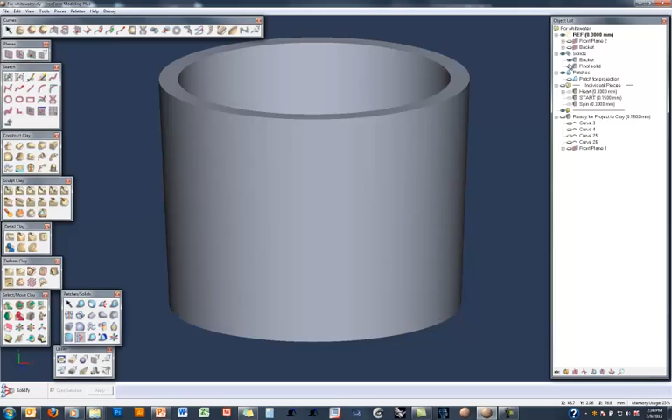So the steps we'd go through would be to import the bucket from the CAD system or build the bucket in FreeForm, no problem. Now, one of the key things here is that I'm going to do some sculpting, but first I'm going to offset one of these surfaces just a little bit, inset, and that's going to give me a load of clay, which is going to look basically like this.

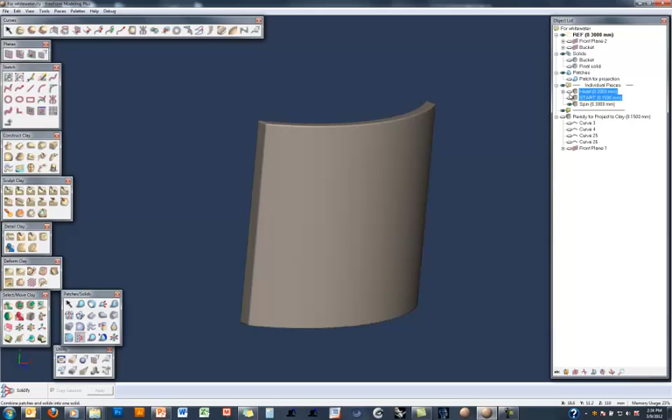So this lump of clay - if I show and hide the bucket again, just to give you some orientation - this is inset just a couple of millimeters to the inside of the outside surface of that bucket, and then you would go in with your typical sculpting commands in FreeForm and sculpt out the bear as you see here. Right now this is 3 separate components, so I would merge all these together into one, and the result would end up looking something like this guy.

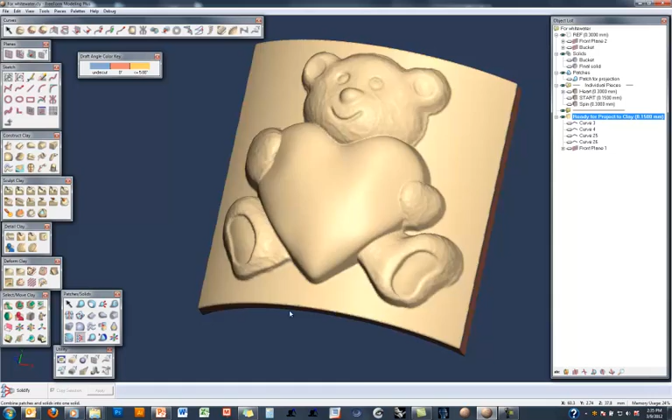Now at this point you may want to just check draft to make sure there's no undercuts, so we can easily define the draft direction and switch on the draft colors, and here we see they're set to 5 degrees, and as we rotate the model around you see that we have no undercuts illustrated.

And if I bring back the initial bucket again, you see that we get a really nice intersection between that clay file and the outside surface of the bucket. Now that intersection is one of the key things here, and that's why I do the inset to begin with, that very first surface. So let's turn off the bucket and turn off our draft.

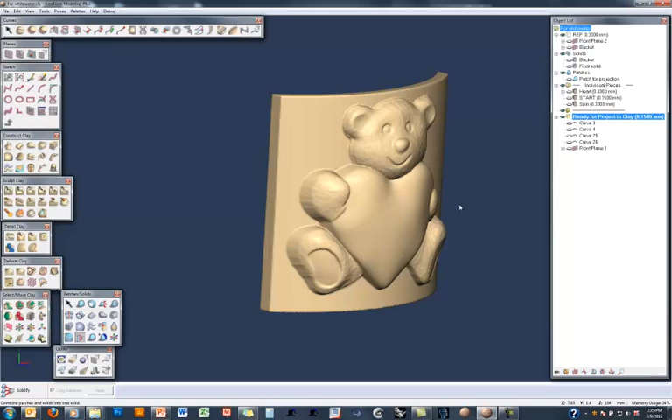And another thing I've done here is actually created a surface which is just replicating that inset surface that you see there. And then I also have a plane which has just got 4 curves drawn on it.

So to capture the detail of the teddy bear in NURBS surfaces, I'm going to use one of the new version 12 commands called project patch to clay. Now I'm going to project this rectangle that we sketched down to that surface, and then I'm also going to add some control points here, and I want the result to be just a surface patch as opposed to a solid, so I'll hit make patch, and then FreeForm pretty quickly goes through and applies those surfaces for me.

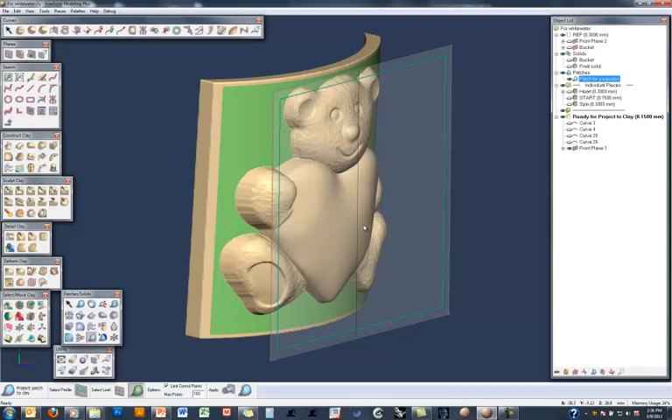I will hide the plane and the clay to show you what the surface looks like. Now I've got 2 surfaces, so I'll just hide the original, and there you see the result of that projection.

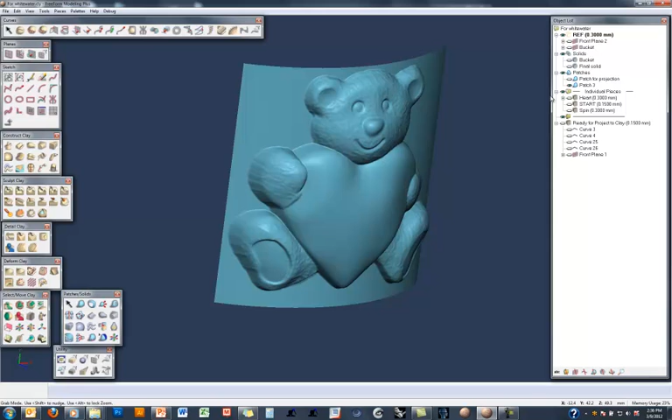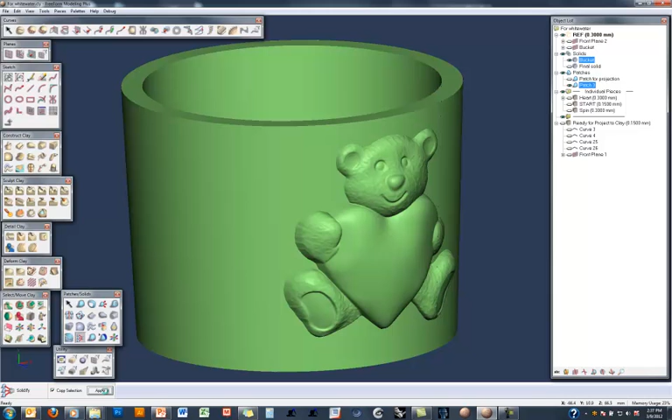Now if I bring back my initial bucket, you can see how that surface and the bucket solid intersect each other, and then to sew these 2 together, I'm going to use another new version 12 command called Solidify. Select the solid for the bucket, and then select this surface for the teddy bear, and just hit apply. FreeForm goes through and trims that surface into the solid, and there you see the result, which is one complete solid ready to go back into the CAD system.

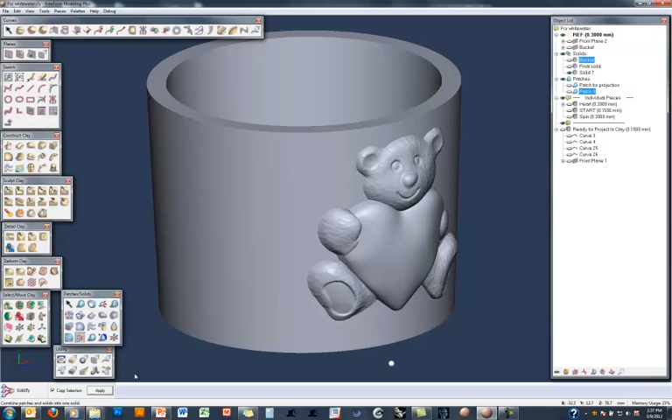And if we wanted to do the inside surface as well, we could have used the FreeForm shelling command to do the B-side surface and then trim that into the inside of the bucket as well. But I think you understand the steps that we go through for this workflow, so that's something you can always try yourself.